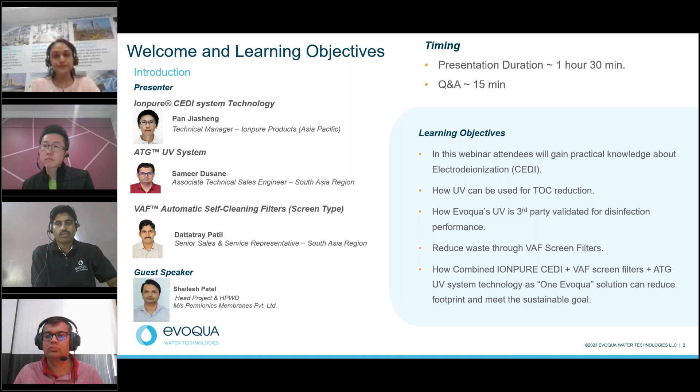Before I start with the product presentation, I will take you through a brief corporate overview. Evoqua Water Technologies is a leader in water and wastewater treatment solutions. We have close to 4,500 team members spread across the globe, with presence in 160 plus locations, and more than 38,000 customers worldwide with more than 200,000 installations. We have offices in 10 countries, and as of September 2022, our revenue has been $1.74 billion.

Moving on, this is big news in the water industry today. The two water leaders are one now. Evoqua has joined hands with Xylem, and as one water company, we want to solve the critical water challenges faced by our customers, communities, and planet.

This is the evolution of Evoqua and our product portfolio, starting from 1913. In 1913, our first chlorinator was installed, and by 1918, more than a thousand cities had our sodium hypochlorite. By 1963, the Aqualator surface aerator was introduced. In 1980, our first OSEC, that is on-site hypochlorite generator system, was introduced. In 1987, our first Ionpure product was commercialized as CEDI technology.

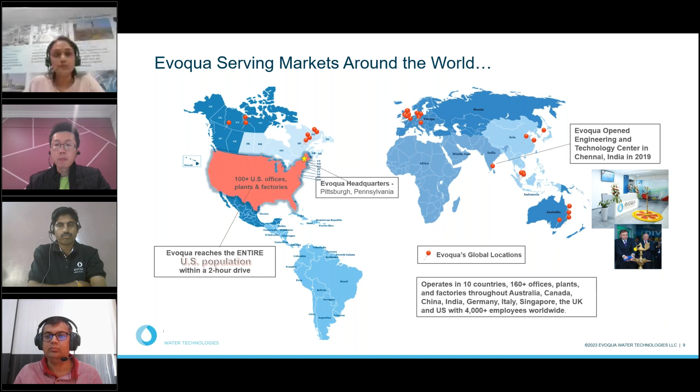We are serving most of the market around the world, with Evoqua headquartered in Pittsburgh, Pennsylvania. We have 100 plus offices in the US, which include plants and factories. We are operational in 10 countries, including Australia, Canada, China, India, Germany, Italy, Singapore, and the UK. We opened our India Engineering Technology Center in 2019. So this is how we are serving a large, growing, and fragmented market.

Starting with the Ionpure brand, which is a continuous electrodeionization product, we have supplied this to brands like Samsung, Toyota, and Toshiba. Our Chloropac, a sodium hypochlorite generating system, has been supplied to Tata, ONGC, and Shell.

Wallace & Tiernan is a gas-feed product and is the active and trusted chlorinator brand in India for over 25 years. Evoqua is an approved vendor for all the major end users, EPCs, and contractors.

ATG UV systems are supplied to most of the brands like Petronas, Cairn, Total, and Dong Energy. And Pacific Ozone is supplied to Coca-Cola, P&G, and Pepsi.

Our lab water products have 1,050 working stations in India, and we have 100% territory coverage with a reputed channel partner base. So with this, I'm ending the corporate overview.

I now request Mr. Pan Jiasheng to take us through the Ionpure brand presentation.

Thank you, I'm going to take over and cover the CEDI portion. I hope I have control over the screen. Suma, next slide please. All right, I don't seem to have control over my screen. Hold on, let me try. Yeah, the reaction is pretty slow, but it seems I have control already. Yes, all right, you have control.

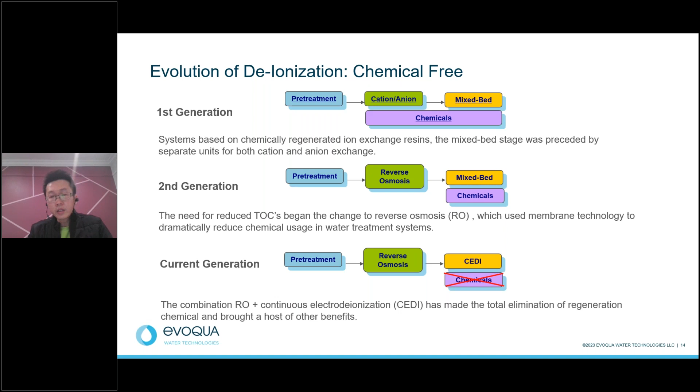In the 1990s, there was a driver for the need for reduced TOCs, so many switched to reverse osmosis. This membrane technology greatly reduced the amount of chemicals used. But after the RO systems, it still goes into a mixed bed, which also needs frequent regeneration. So in the 1990s, the amount of chemical consumption dropped probably by around 50%.

Since the early 2000s, there has been pre-treatment with UF, RO, and EDI. This has led to the complete elimination of regeneration chemicals, and it also brought a host of other benefits too.

Okay, all right, next slide, let's see.

So what is CEDI? CEDI stands for continuous electrodeionization, a water treatment technology that removes all of the ions in the water with an electrically active media, that is the resins itself, and makes use of an electrical potential to promote the ion transport into the reject stream.

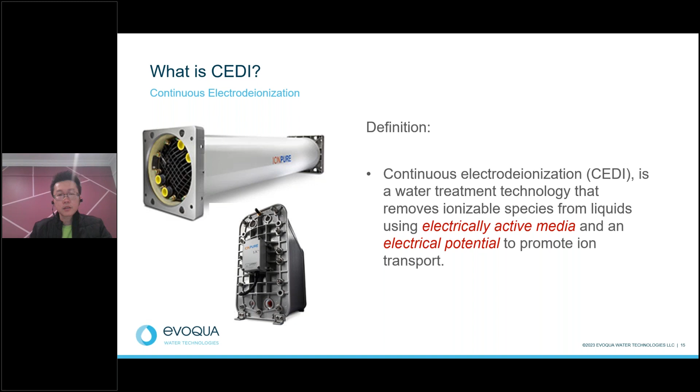For CEDI technology, it started off with the ED process. ED stands for electrodialysis. In the ED cell itself, there are alternating anion membranes and cation membranes. These are special membranes that only allow cations or anions to pass through, and all of these membranes are impermeable to water.

For ED membranes, only the ions pass through, and all of the water will not pass through. So all of the salts transfer out of the product stream and are trapped in the reject stream. So the ED process is not effective at producing high quality water. Its principal use is just for desalting brackish water, and also for seawater desalination.

Changing from the ED process into the CEDI process, all that we did is add resins into the module itself. So now there's a combination of the membranes and also the resins. These resins are very, very conductive, and they promote the transport of ions into the reject stream. It also requires a special cell to contain all of the resin.

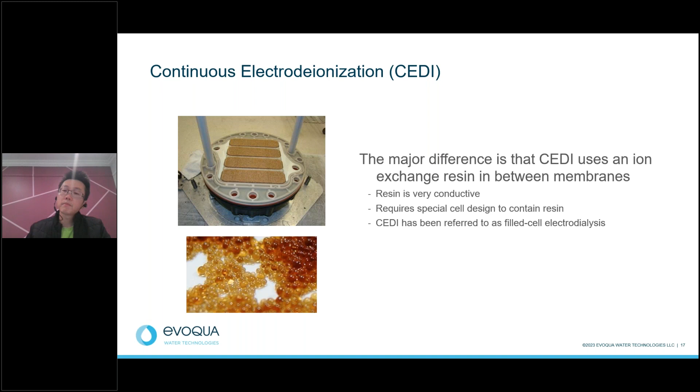Here is a moving diagram of how a CDI works. On the right-hand side, it's actually a 3-cell spacer where there is resin in all of the module. As water starts to flow through the module, all of the cations and anions get put into the reject stream, while in the middle stream there's the product water, which is the high purity water.

As the EDI cleans the water this way, all of the resins inside are going to be exhausting. But at the same time, in the module there is the water splitting process, the magic that's going on, where the water splits up into H+ and OH- ions, continuously regenerating all of the resins at the same time it's being used.

So instead of making use of real acid and caustic, what happens in the module is that the water splits up, and the H+ acts like the acid, and the OH- acts like the caustic. So the EDI process is a truly chemical-free continuous process.

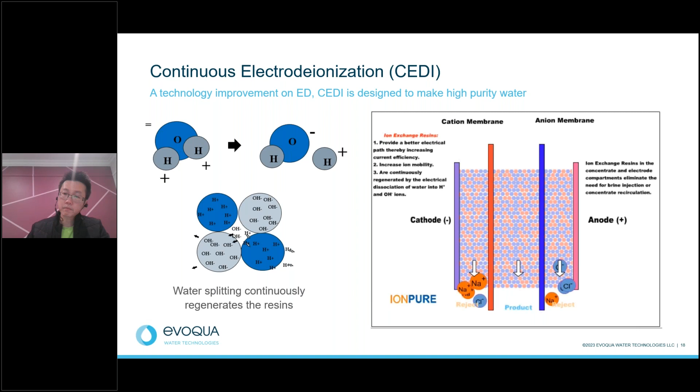With that continuous process and continuous regeneration, on the right-hand side diagram, EDI delivers consistent performance, consistent quality, consistent flow rate. If you were to make use of a conventional mixed bed system, as we know, it's a batch production, so there's a potential breakthrough.

At the point where it breaks through, the water quality on the product side is going to dip - there could be a breakthrough of silica, of sodium, or the resistivity could be too low. At that stage, the current mixed bed must be stopped, and the standby unit must kick in to continue water production.

So for CDI, it can actually exceed the quality of a mixed bed DI. That's because in a mixed bed DI, sometimes there could be poor regenerations, and there could be some losses of the high purity resin in the mixed bed, which results in a short vessel run.

CDI modules - in the Ionpure brand there's the normal grade of CDI modules and the high grade of CDI modules. The high grade makes use of special resins in the module that are able to achieve up to 99% or 99.8% of silica and boron removal. So in short, for CDI there are no spikes and no breakthrough in any way.

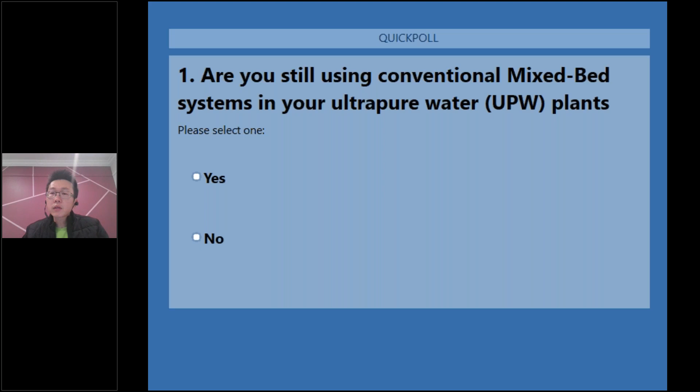All right. So I can see from the poll that 69% of the people are still making use of conventional mixed beds. And then 31% are making use of EDI, regardless of whichever brand is in the market. So for those people still making use of the mixed bed, please listen more. I'm going to talk more about the EDI systems. Okay, so next slide.

All right, so I'm going to come to the major cost components of the EDI. For the mixed bed, the major cost components are labor, resins, chemicals and wastewater. So a big bulk is going to be chemicals and wastewater. But for CDI, there's only labor, minimal labor, okay? And then there is module replacement once every 5 years. There is the consumption of DC power. And then there is also a requirement for some routine maintenance like CIP cleaning, which I would say, typically in microelectronics where the pre-treatment is much better, could be once in 2 years. So mixed bed DI is a batch process that requires constant labor and chemicals.

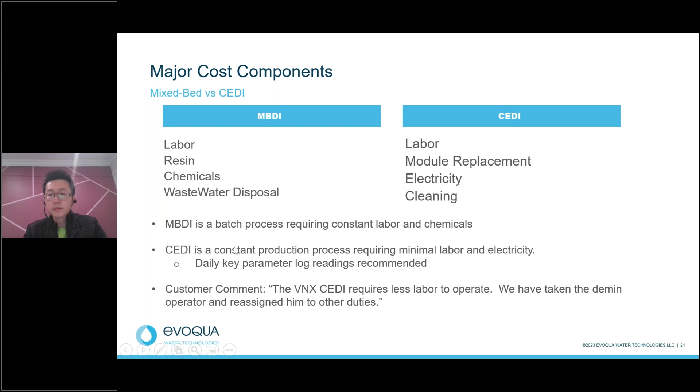All right, so in all, there is an OPEX cost saving of around 50%. So for the 31% of people who have made use of EDI, they would probably say that the purchase price is important, but it's not number one. Its operating cost is also extremely important, because that is a constant fee that's going to be paid on a yearly basis.

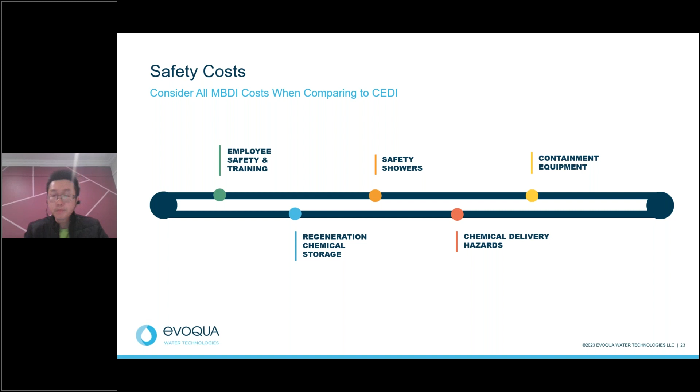Okay, so here is a quick summary of why the solar industry is going to choose CEDI over the mixed bed DI. Most importantly, there are no chemicals. There is very, very little downtime. It's a consistent performance. It's guaranteed leak-free up to 7 bar. There is superior safety. In terms of the footprint, it's very, very small.

In terms of its cost to operate, it's much less compared to the mixed bed DI. There is reduced labor, so the operators can do other things too. And for CEDI, it's a continuous process, it's not batch. And then there is a complete reduction of health and safety risk. All right. So my next slide.

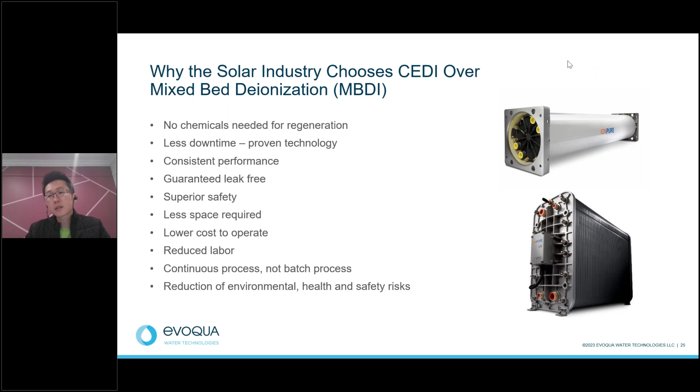All right, so here we are at poll number 2. I'm going to spend some time over here, just to ask what is the most concerning factor when it comes to equipment design in UPW plants. So please open up the poll. There are a few options, like safety. Is safety a concern for you? Is footprint a concern for you?

For plants that are currently making use of mixed bed, I guess the footprint is probably very concerning to you. Is low CAPEX cost or low OPEX cost important? And would you like your plant to be fully chemical free, or all of the above? Okay, I can see that still only 33% of people have voted. So let's wait a bit longer. All right, so we have 60% of people that have already voted.

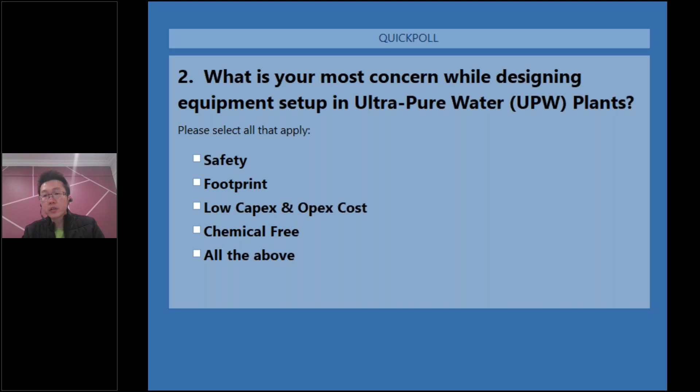All right, so I'm just going to share the results. There is 5% for safety, 11% on footprint concerns, and 37% on low CAPEX costs and operating costs. There's only 5% that want it chemical free, and then 63% are saying that all these things are very, very important to them. All right. So let's move on to the next slide.

All right. So here is a very typical setup for the microelectronics industry. It starts off with the pre-treatment.

And then it goes into a dechlorination system, where people use either the ACF or sodium bisulfite. After that, there is some anti-scalant, where it goes into a 2-pass RO. It feeds into an RO permeate tank. After that, it goes into a UV TOC and then into our EDI module.

So a lot of plants like solar plants make use of a UV TOC, and for our Xylem brand, we also have our own brand of UV, called the ATG brand. The presenter later is going to talk more on the ATG model.

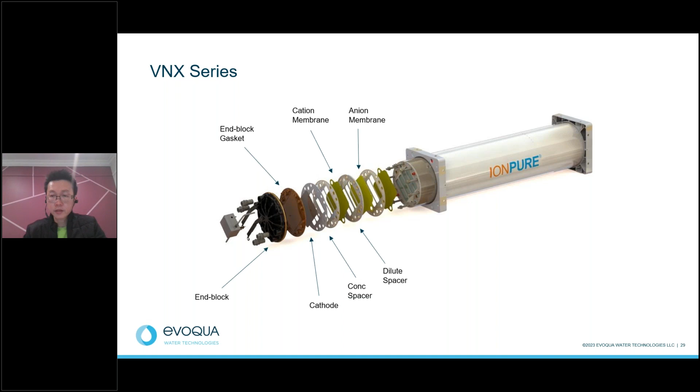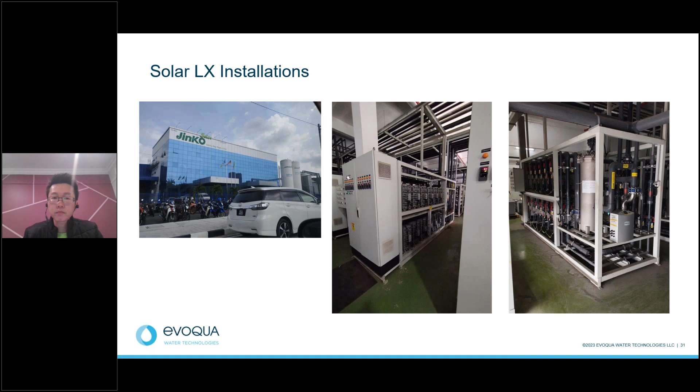Let me see if I can get back to the previous slide. It doesn't need any form of transformer. The DC3 controller takes in three-phase power from the factory source and dishes out a single-phase output straight into the module. Although the controller is quite big and bulky, there is no need for a transformer, so designing the control panel is very easy and sweet.

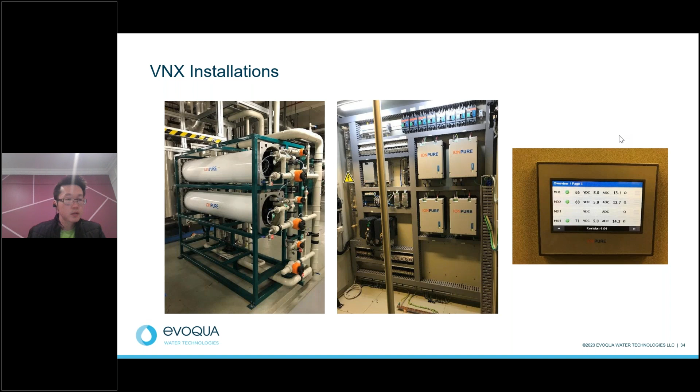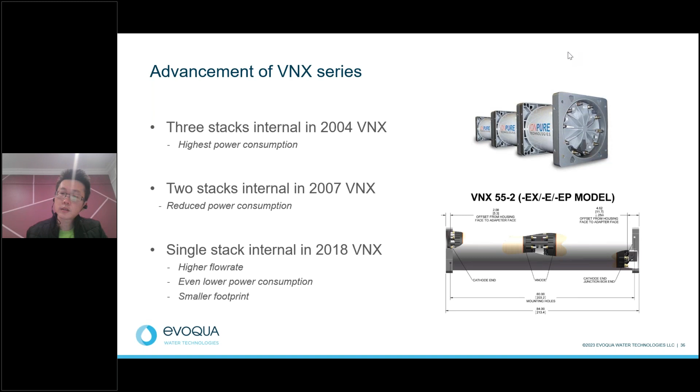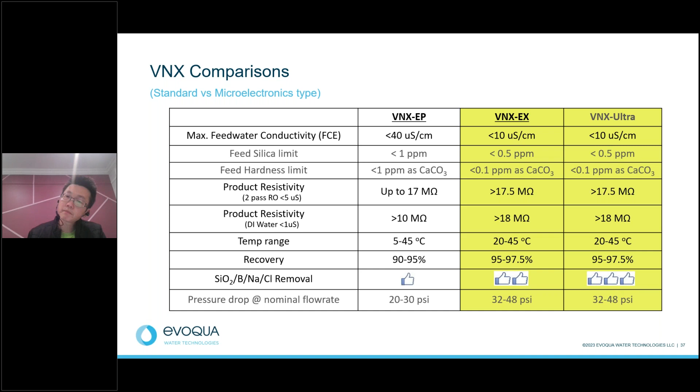All right, and then in terms of recovery, EX and Ultra is much higher, up to 97.5%, and more importantly the individual ionic removal is much better. Okay, and also just to let you know, the VNX Ultra is actually equivalent to a 2-pass EX module. The EX is up to 99% silica and boron removal, the Ultra up to 99.8%. Next slide.

Suma, can you help to move the slides?

Okay, and a lot of them want to increase their flow rates at the same footprint. So all they do is replace the VNX 55 with the VNX Max. It's exactly the same kind of module, the same resin configuration, the same performance, only the flow rate is much higher. So if you change one piece into the VNX Max, you get around an extra 10 GPM. So if you have a skid of 5 or 6, that is equivalent to getting an extra module in the whole skid itself.

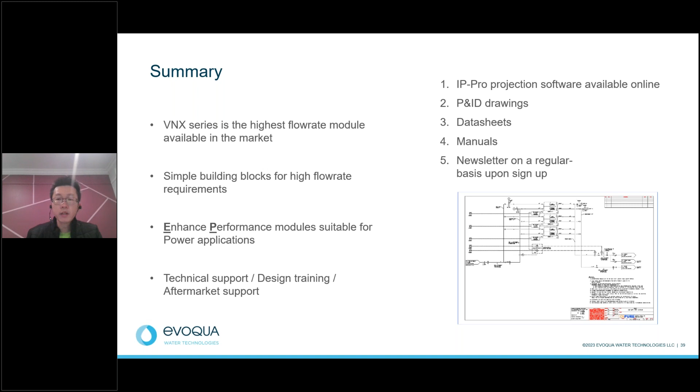All right, I think with that, that is the end of my presentation. If there's any questions, that's going to be at the end of the whole three presentations. All right, so I'm going to pass the baton back to Suma.

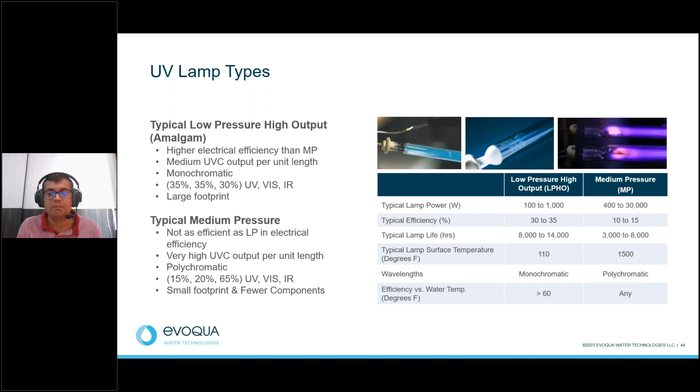This is the major difference in terms of safety and control systems - you don't need storage unless specific storage is required. The handling is very simple, you can transport it from anywhere, and no toxic or corrosive chemicals are required to operate this UV system. It's very easy to use, it's a retrofit design, easy to install, and you can change the lamp in one or two minutes. It's simple maintenance and reduces your OPEX costs also.

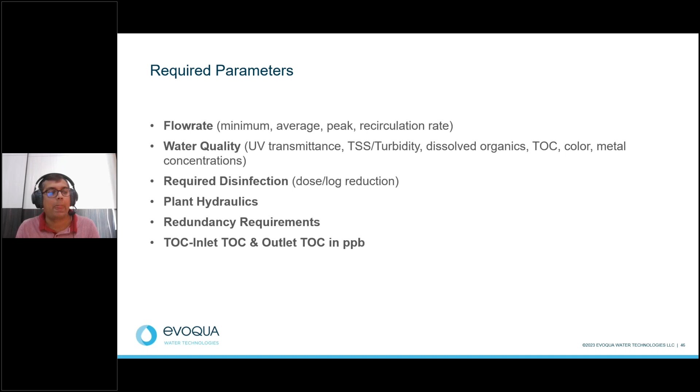Now, where can we use UV systems? You can use UV anywhere there's a process that's chemical intolerant, or where there's chlorine-resistant microorganisms. You can use this UV system across all industries - wastewater treatment and reuse, drinking water purposes, pools, water parks, irrigation, and most importantly electronics and pharmaceutical, automotive. Any industry can use this UV system.

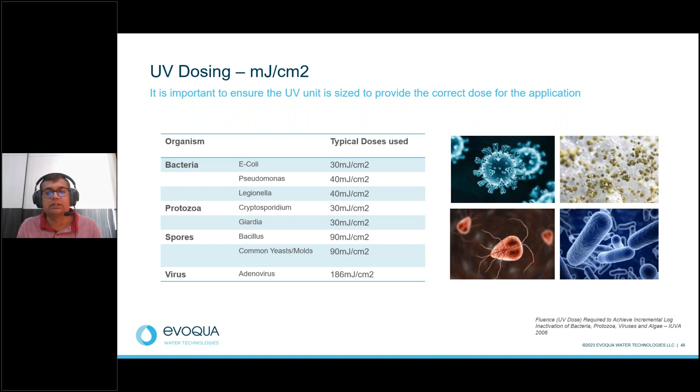Now your poll starts. 20% of people are saying 253.7, 33% are saying 185. 42% of people have voted, 48% checked within 5 to 10 seconds. Now 61% have voted.

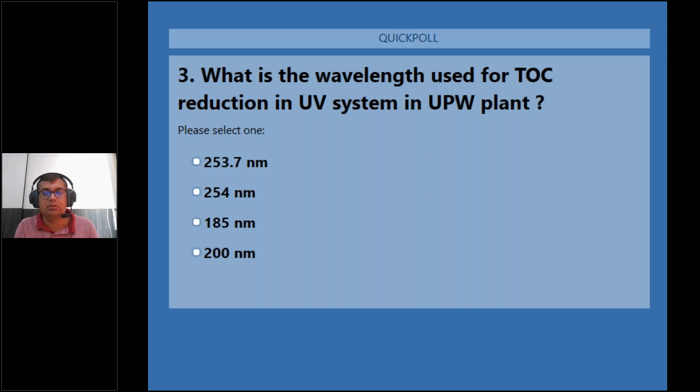Now we can see the poll results. 21% say 253.7, 32% say 254, and 32% say 185 nanometers. Actually, 185 nanometer is the correct answer. Theoretically, 185 nanometer is required to inactivate and reduce the TOC from ultra pure water. We'll discuss later in this presentation how the TOC reduction mechanism works.

We have an ATG UV system, and we have one model for TOC reduction, the VT series. ATG UV is around a 40-year-old UK-based company, with all manufacturing facilities in the UK. We have lots of installations globally over the last 40 years.

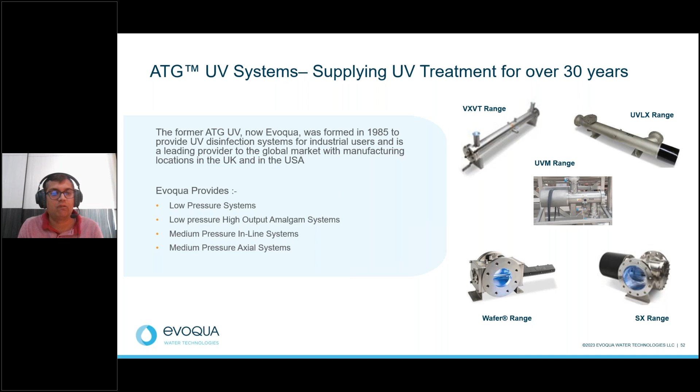Yeah, these are the product range we discussed earlier, low pressure to medium pressure. The brand name is called ATG in the APAC region and EMEA region, and for North America, the ATG UV system is called ETS as a brand name. Globally, we know them as ATG and ETS.

You can see here the low pressure system. Our range is available from 1 lamp up to 32 lamps. UVLX up to 45 lamps. Wafer series systems up to 12 lamps, and SX series 18 lamps, followed by UVM series for dechlorination and TOC purposes for 8 lamps. These are the variables, different types of lamps combined with the one UV system ranges available in our UV product portfolio. We can use any of these for different applications.

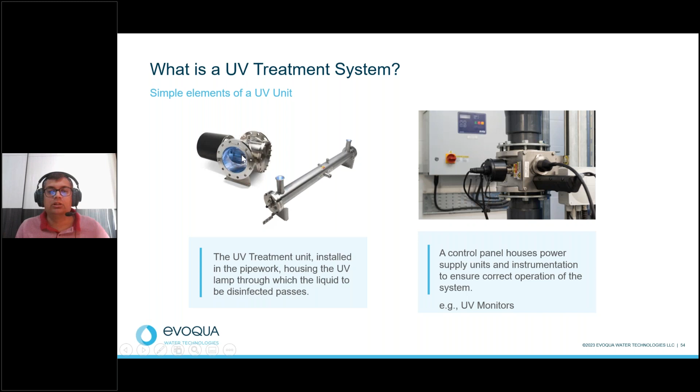It is particularly designed for the TOC reduction. This is what we discussed earlier.

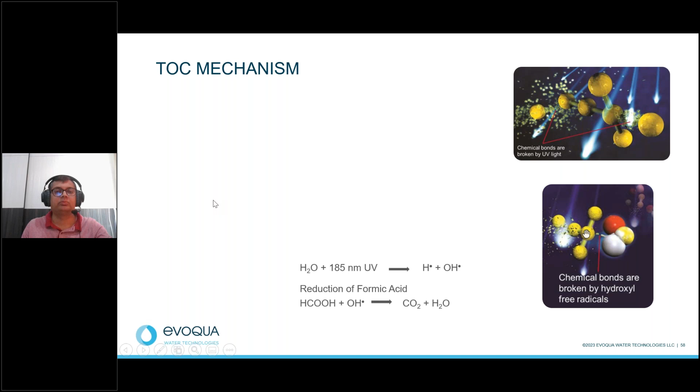This is the TOC mechanism. While most organic compounds are decomposed to CO2 and H2O, other more resistant molecules and weakly charged ions remain. This causes a resistivity drop, requiring removal by downstream DI and EDI systems. If you see here the diagram, TOC plus 185 nanometer breaks into H2O plus CO2, which gets released from the water.

This is the same mechanism we discussed. H2O plus 185 UV goes to H plus OH plus ions, and through reduction, formic acid HCOOH plus OH produces CO2 and H2O, which get released.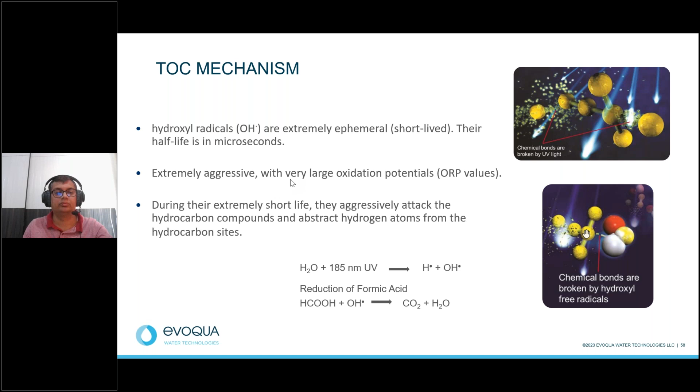This is our VT lamp - a key and efficient TOC reduction unit in ultra pure water applications, with maximum up to 25% 185 nanometer TOC output. The high levels of 185 nanometer spectrum require less power energy, but at 254 nanometer, higher power is required to operate TOC reduction UV systems - very high dosage and very high power is needed. This is the simple comparison we can discuss here.

Our VT lamp is made of the finest grade material, with a longer life up to 16,000 hours. It's available with 300 watts of UV lamp power, very high compared with others. Due to this high power, fewer lamps are required even for higher flow rates.

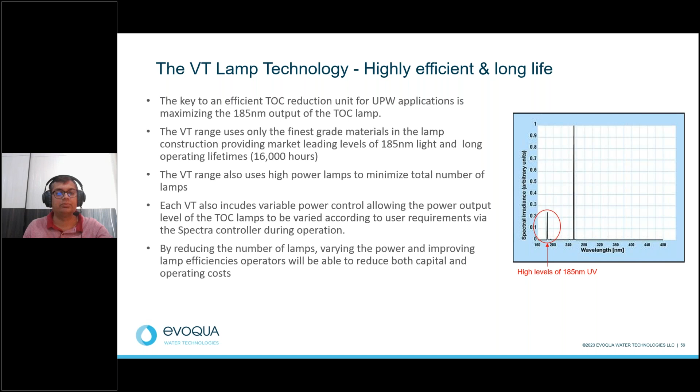Yeah, this is where we can discuss semiconductor, where the very high ultra pure water, type 1E water, is required, and for solar industries. So you can see here less than 1 ppb water is required to reach the wafer of the semiconductor device. This is the major advantage of the UV systems.

If you use this water, you get greater wafer yields and the switch to smaller chip geometry, such as 0.07 micron line width. It's a very high performance UV system we can offer you compared to the others.

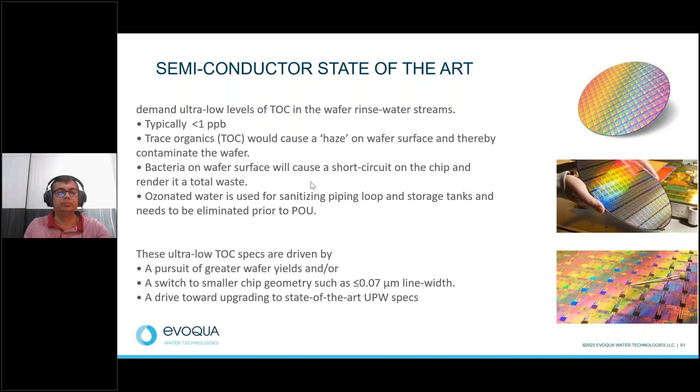Yeah, you can install the UV system vertically or horizontally. This is flexible installation, with a small footprint area required. This is an example of the VT24 model you can see here. Next slide, please.

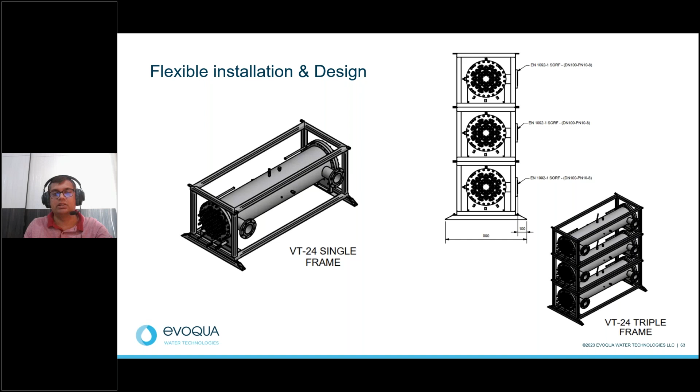Yeah, some reactor features we can offer you are a simple TwistLok design mechanism, and a V Clamp design for leak-proof design. You can change the lamp in the UV system in hardly 1 or 2 minutes, even in running condition. This is our patented technology we can offer you in the UV systems. Suma, next slide.

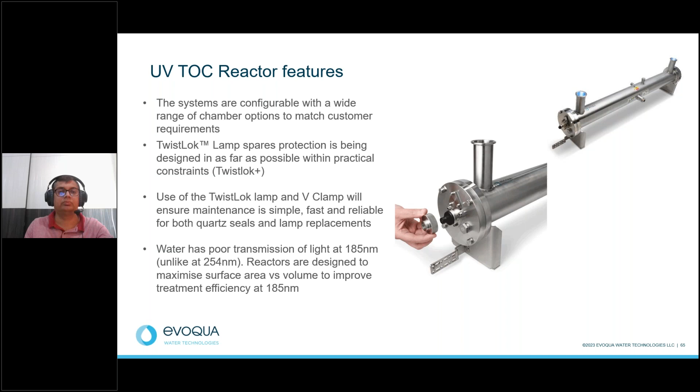Yeah, these are some reactor features, as per the ultra pure water requirement. We can see here the lamp life is 16,000 hours for the 300 watt UV lamp. It's a TwistLok design. The internal and outer surface finish is available at 0.4 or 0.8 RA. If you require electropolish or mechanical polish, machine polish is also available.

Most important, the UV system has a variable power controller. It operates depending on your flow rates or your UVT, from 60% to 100%. It's an automatic dose-based system. You can reduce the power of the UV system. Yeah, these are some features available in our UV systems.

And this is the controller, a microprocessor based controller. You can configure it with your Modbus and BMS systems, and you will get all this data from the microprocessor touch panel UV system from your remote location, and you can see what the parameters are

and the current, all these things you can check with your mobile and your tablet. The only thing is the equipment must be connected to the internet. This facility is also available in our Spectra UV control panel. Yeah. So my next slide, please.

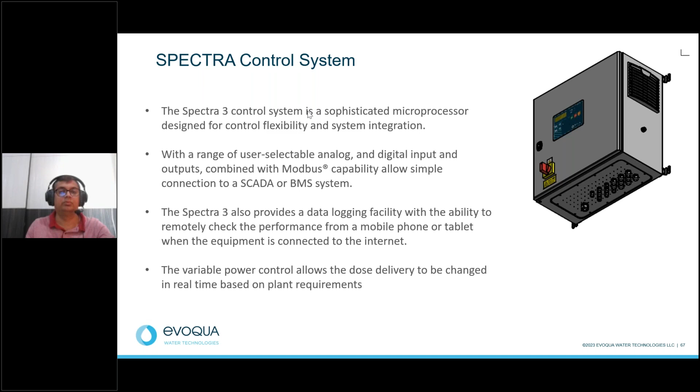Yeah, this is the Spectra controller range. Standard and options are available. In terms of material, the standard we offer is epoxy mild steel, 7035 color. Stainless steel SS304 option is also available. It is a microprocessor based control panel. For ingress protection, IP54 and IP56 are also available for outside application.

It's environmentally controlled; we can install a forced air cooling fan for ballast cooling for these UV systems. The communication ports available are RS422 and RS485. It has a door locked MCCB isolator and operating temperature up to 40 degrees centigrade. We can share our product catalog, or it's available on our website. Yeah, Suma, can you go to the next slide?

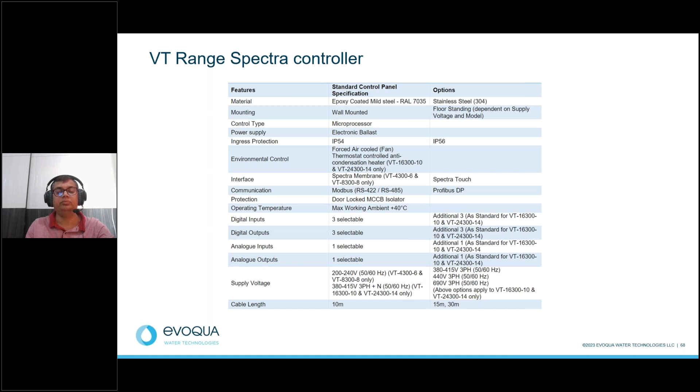Yeah, these are the control units available in our microprocessor-based control panel. You can display information: the lamp running condition and how many hours, the lamp current, how many strikes per day, the lamp fault information. If the lamp breaks or the quartz sleeves break, the information goes to the system and the system starts or stops in any fault condition.

For analog input, a UVT meter or flow meter can also be configured on our UV system. And as we discussed, both communication protocols are available, and Profibus DP is also available, but it is a non-standard panel. Optional, we can offer you. So next slide, please.

Yeah, these are the digital inputs and outputs. You can configure them as per your process requirements. With the three digital inputs you can remotely start, stop, power boost. You can connect the UV panel according to your water level tank. You can reset alarm, process interlock. Outputs are temperature alarm, remote control, dose healthy. If the dose is not healthy, then you will get details on your UV systems. All these digital outputs are available in our UV systems. Suma, next slide, please.

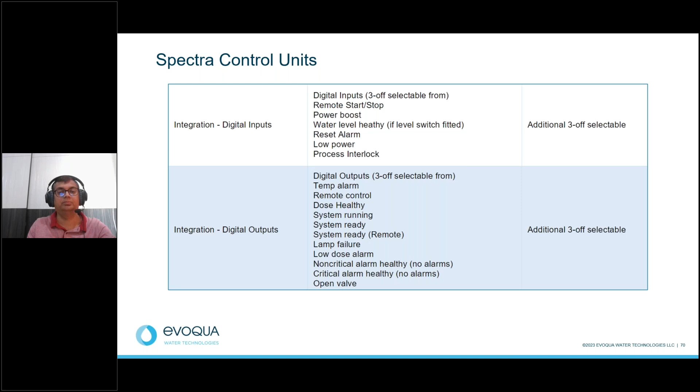Yeah, as we discussed earlier, the data log is available, and you can get all this data to your remote location by Profibus or Ethernet connectivity or any web access, like dosages, UVT, power, lamp hours, lamp current. All these data are stored in the microprocessor-based control panel, touch panel. You can access it anywhere. Yeah. So, next slide.

Yeah, this is the simple architecture for the microprocessor-based control panel. The membrane with OLED touch display panel, or a 7-inch touchscreen also available for higher models. All the data is stored on the SD card. You can remove the SD card and check the data. The SD card is connected with the motherboard and the touch display panel. And this is the electronic ballast, and the motherboard operates the electronic ballast of the variable power controller system. Suma, can you go to the next slide?

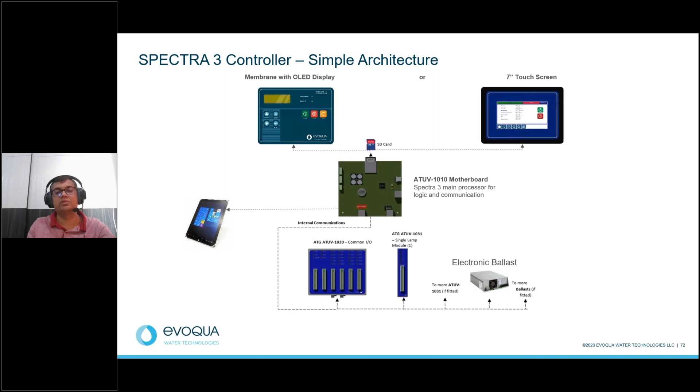Then there's some transition there. Hello. Yeah, just a second. Am I audible? Yeah, you are audible. Can you go to the next slide, please? I think, yeah, I've gone to the next slide. I think it's not visible at your end. It's not visible.

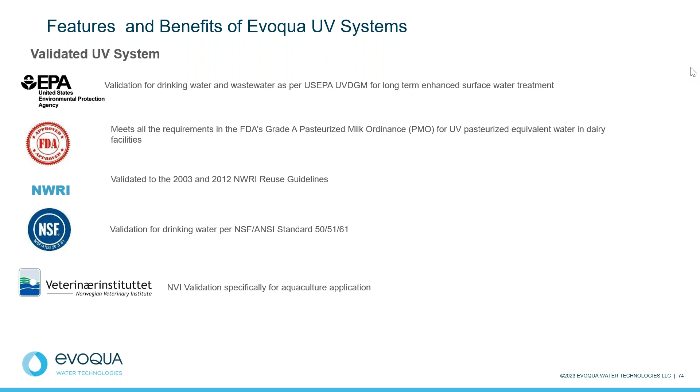Hello. Yeah, yeah. I've gone to the next slide. Yes. I think the last slide is some case studies and installation photographs. Can I switch off my camera? Then the transition will be faster. Can you change the slide? Yeah, I've changed the slide to the case study slide. It's waiting for the next screen. Connection, just a second. Weak connection.

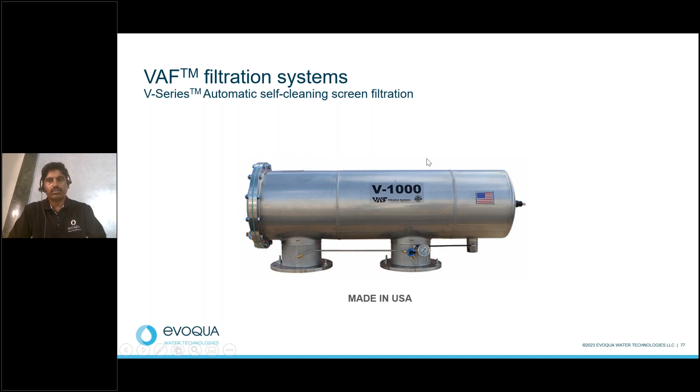Filtration technology landscape. Yeah, next slide. I've moved on to this next slide. Yeah.

So this is the filtration technology landscape. You can see what particulates are available in the water and what technologies are available in the market. From centrifugal separator to screen filtration, media filtration, bag filtration, cartridge filter, these are the technologies available. So according to the particle size, we will choose the filtration system.

These are the particulates available in the water, like human hair, plant hairs, beach sand, and so on. According to the type of particulate, we will design, consider, or propose the technology. Out of these, we will discuss screen filtration in detail, that is, automatic screen filtration.

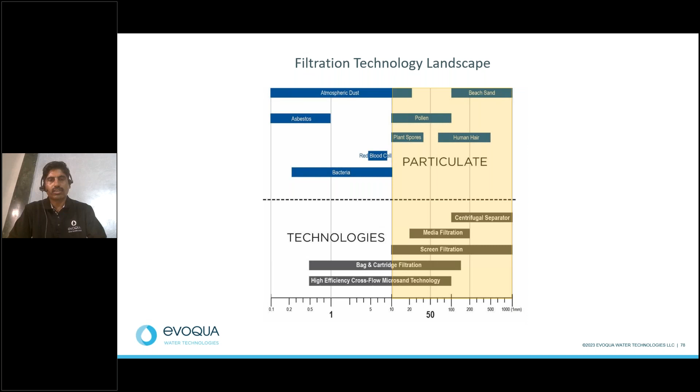Okay, next slide. Yeah, just waiting for the next slide.

The history of this product is that in 1985 the screen filter was introduced by one of our US distributors and named the automatic self-cleaning filter. In 1995 standard manufacturing started, piston type and electrical type, called the VAF-2000 series. Then in 2003 a new patented design was introduced, our V series automatic screen filter.

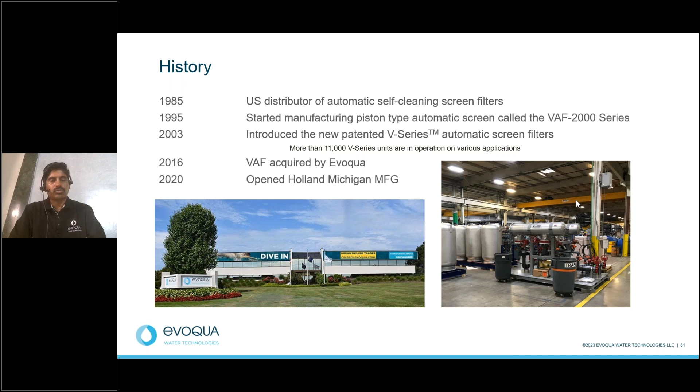By 2016, the automatic screen filter had more than 11,000 installations around the globe for various applications. In 2016, Evoqua acquired this VAF filter, and we opened a new facility in 2020.

Next slide, Suma. Yeah, I'm on the next slide. So as I told, we have 11,000 installations worldwide. This is a map where you can see the installations, and you can also get the details if you want. So next slide.

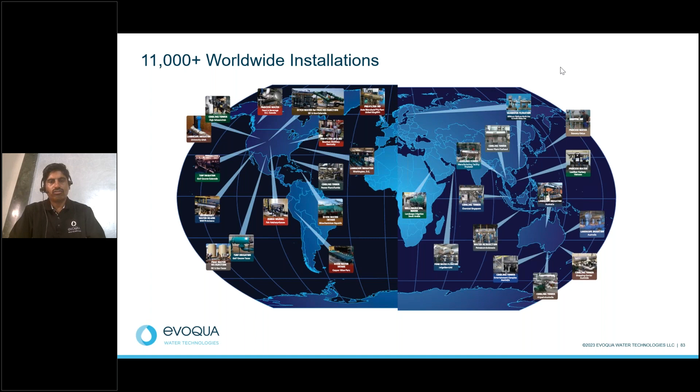Yeah, there is a poll question. Just a minute. The poll question is: what type of pre-treatment filtration system is currently used in your ultrapure water plant? Okay, your poll starts now. There are three options: conventional sand filter, any screen type filters, or others. Okay.

Yeah, close the poll questions. Yes, so, okay, next slide please.

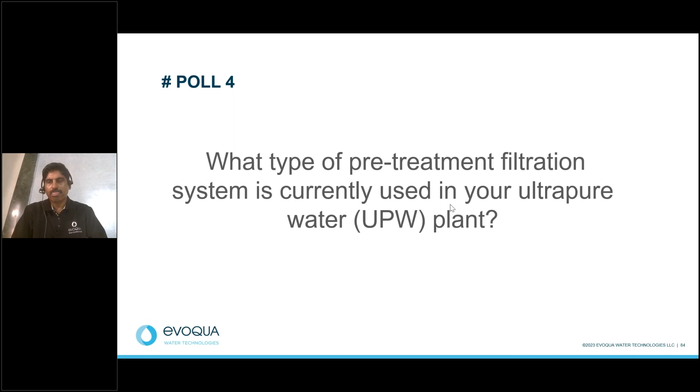So this is automatic screen technology, how it works. We are just explaining with this video. Please, next slide.

Next slide. Yeah, it is coming. It is processing. Patilji, can you please switch on your camera? Then the transition may be faster due to the low connectivity. Okay, no problem. Next slide. Yeah, just a second. It is waiting for the next screen.

Yeah, so this is a video where you can see the filtering mode, how it filters the water in normal mode. Please start the video.

Yeah, it is started. Not started. You click it here. Yeah, I've clicked it. Starting.

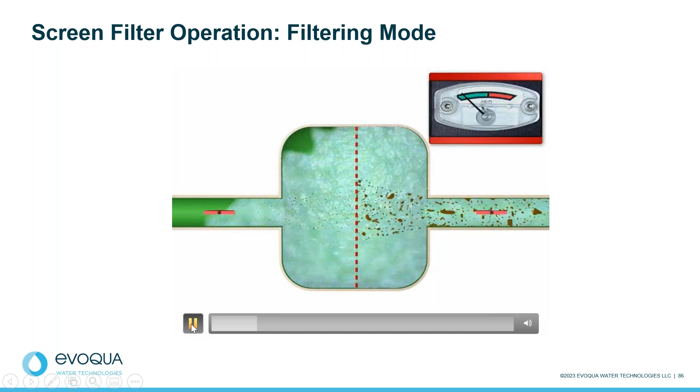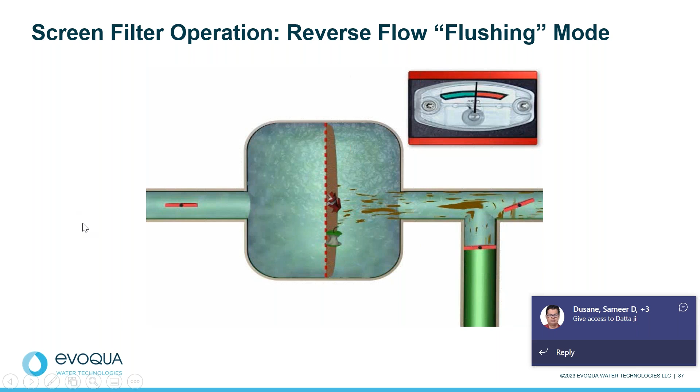Next screen. Screen filter. Reverse flow flushing, but it's not showing here. Still it is filtering mode. You can stop this video first, then go to another slide. It is showing it is still running this video. Just close or stop this video and go to the next. Otherwise, I will give you the access, keyboard and mouse control, so you can operate it from your end. My screen gets stuck with that video. Now you're on the 89th slide. Sorry, because of some technical issues, sorry for the disturbance.

This is the filter types, that is screen filter types. One is the piston scanner, single pass technology; electrical drive, which is also single pass technology; and the third one is the V series system, patented bidirectional cleaning multipass. So these are the three technologies available for cleaning these pre-filtration systems.

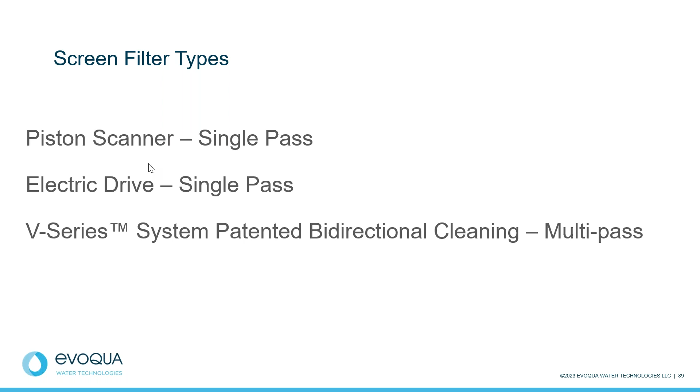So first one is the piston scanner filter. This is the assembly. This is simple, single pass technology, operated using a piston on-off. Piston scanner filters have some benefits: lower cost, simple controls. It is useful for agricultural drip irrigation.

And it has some disadvantages: no control of suction nozzle movement, higher flush flow rate. They take higher flow for flushing. Doesn't work well at pressures above 5 to 6 bar. And we found some shaft seal leaks also. These are the disadvantages of the piston scanner filter. Next slide.

So this is the second one, the electrical drive filter, which is operated by electrical drive technology, and which is again a single pass filter. Next slide. They have some advantages: controlled suction nozzle movement, meaning the nozzle is controlled electrically, and it works well up to 10 bar.

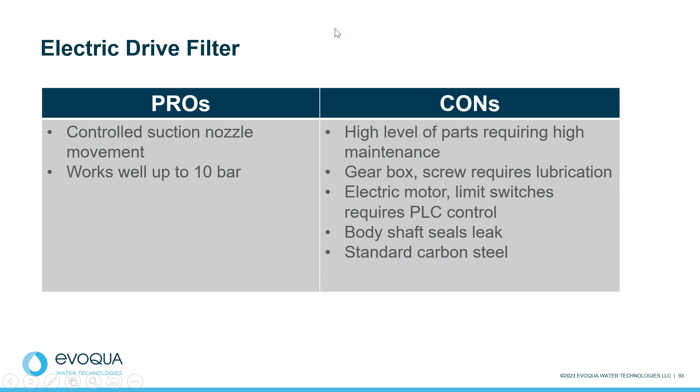So the third one is the V series automatic screen filter. This has 60 parts. Next slide please. So this is the main part: this is your inlet, this is the outlet. It has the main coarse screen, which traps all coarse particles, then water passes through the fine screen. The fine screen takes care of the other fine particulates and goes to your outlet. Inbuilt is the suction nozzle, and a water motor inside for movement of the shaft.

During operation, after delta P builds up, the filter automatically goes to flush mode. Next slide. So how it works inside, this is a video, please start the video. This is the filtration mode. Water comes from the inlet, goes to the first coarse screen, in to out. Then, using the shaft movement, it goes to the next screen, that is the fine screen.

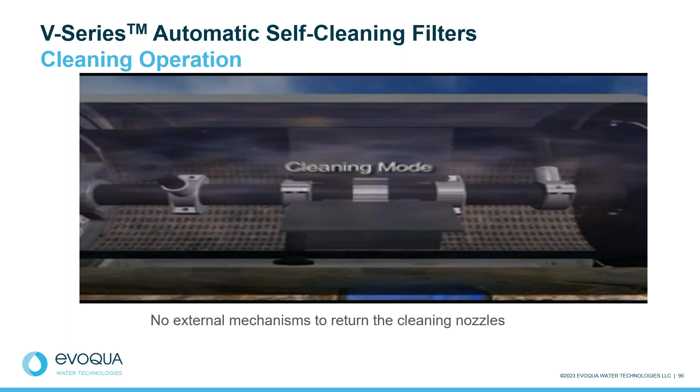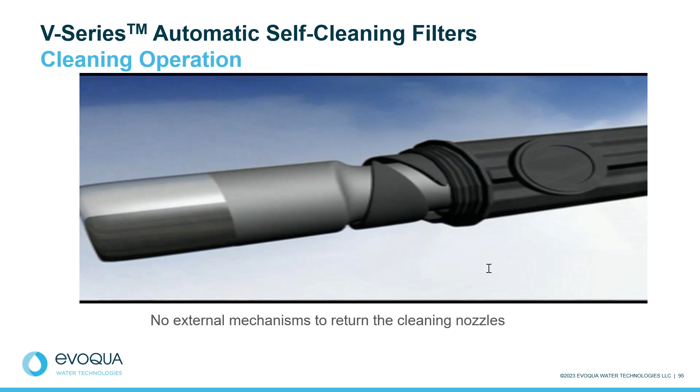And when delta P gets above 5 psi, the flush valve opens automatically. By using this vacuum, the shaft rotates and does the cleaning inside the screen using reverse flow, reverse acting. All media, all screens get filtered by this flapper. 10 to 15 seconds are required for one pass, and this is the indication that cleaning mode is going on.

This whole process, from filtration to cleaning, is automatic. No external mechanism is required for these cleaning nozzles. So you are continuously getting outlet water during flushing mode also. This is one of the advantages, and the flush discharge is only 1% of your feed water. So a very small amount of wastewater goes out during flushing mode.

Next slide. Next slide, Suma.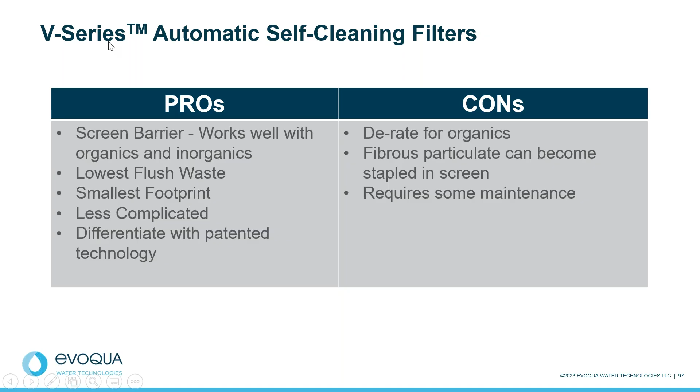This is the technology differential feature, that is the patented cleaning mechanism. Simplicity, minimal parts, no external shaft or seals required, no pistons or electrical motor required for moving these shafts, and minimal maintenance. Next.

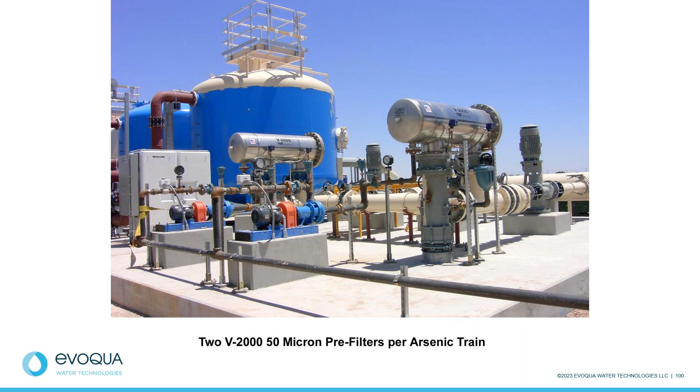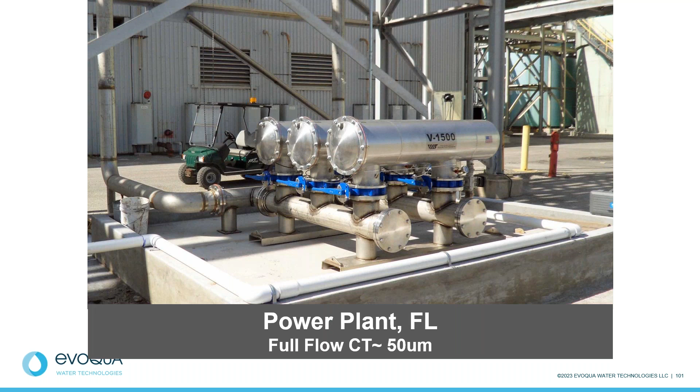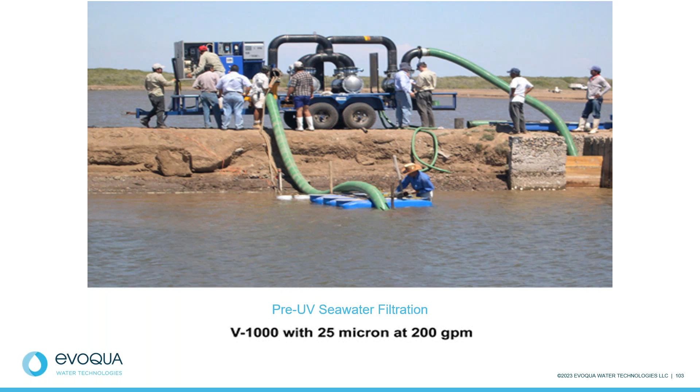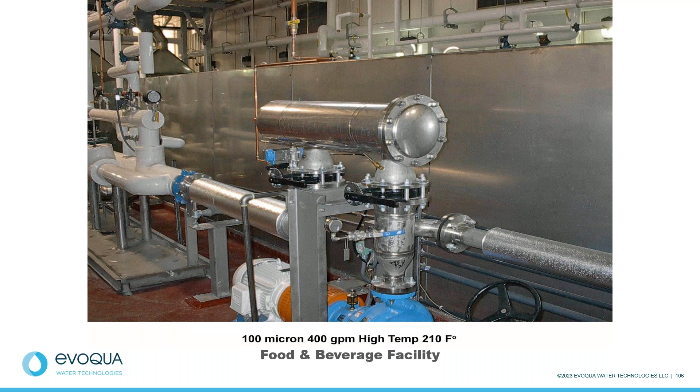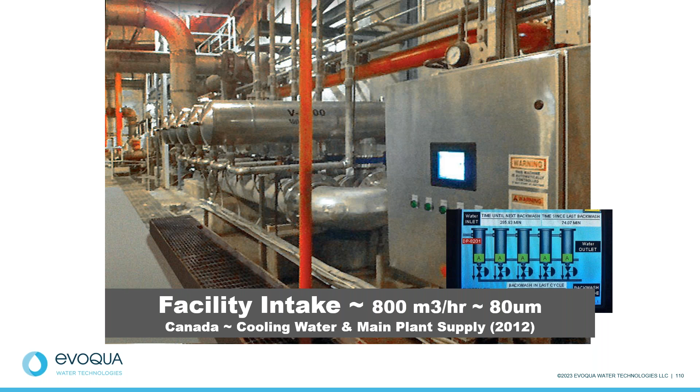So this is surface and depth filtration, that is inlet to outlet, top to bottom, and backwash from bottom to top, reverse flow. And it has some media inside: coarse, fines, pebbles. Next slide.

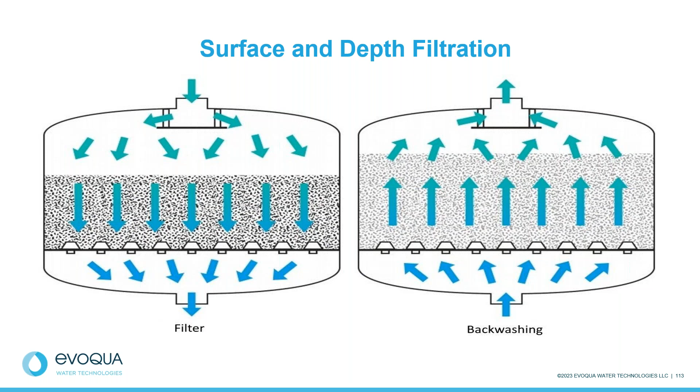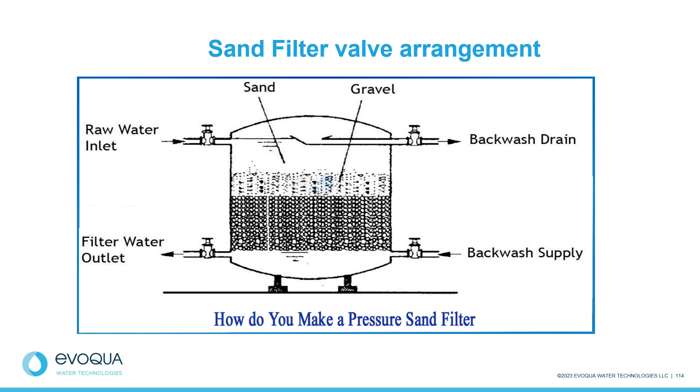So this is the filtration arrangement: raw water inlet from the top, and you get outlet filtrate water at the bottom, and through the same valve you can give backwash from the bottom, and the backwash goes out from the top. So it is basically top to bottom or bottom to top.

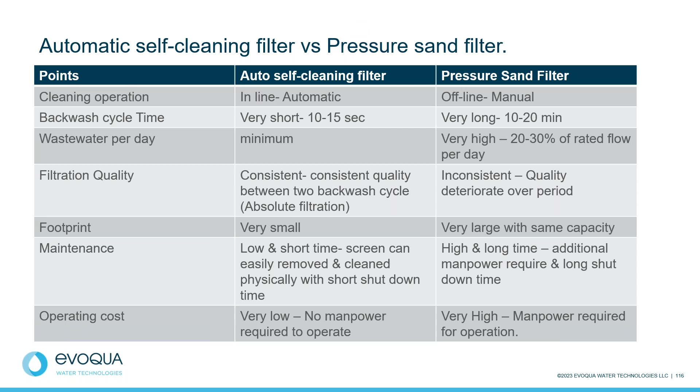Next slide. I think the slides end here from my side. So if you have any questions, you can ask during the last session, or you can send me the mail.

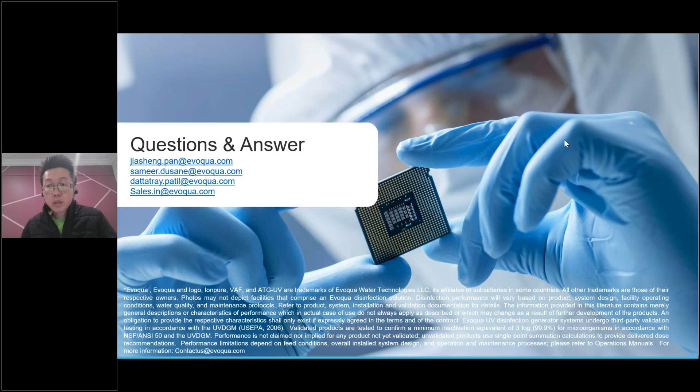Hey, is it possible to share my screen? Yes, you can share your screen. Just a second, all right.

So what I've done is a Microsoft Excel sheet on the parameters. That's based on an FCE of around 12 microsiemens, consisting of 5 microsiemens from the 2-pass RO, about 2.5 ppm CO2, and quite negligible silica, based on the quantity of the modules.

It's also based on the flow rate, so it gives an estimate of the power consumption in kilowatts per day, assuming you're running on a 24-hour, 7-day basis.

All these numbers I tried to derive from the IP Pro software. If you have your feed water parameters and flow rate, it can actually tell you better in the software. But here is a slide of what I have: if you have around 6 modules of VNX Max, it's close to around 200 kilowatts per day.

If you compare that to the conventional mixed bed system, conventional mixed bed doesn't need any electricity, but it's more about the chemical consumption, the daily purchasing, and wastewater disposal, which I showed in my slides. I think they cost a lot more in terms of OPEX compared to the CEDI.

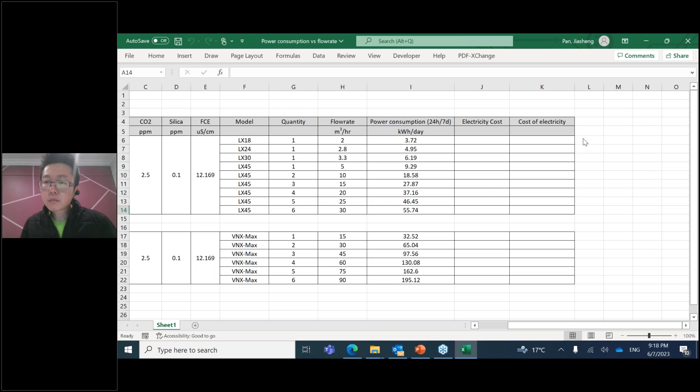Next question: what is the difference between the conventional filtration technology and the current technology you are talking about? This question is for the VAF, directed to Dattatray Patil. Can you please answer this question?

The answer is that conventional technology requires filter media, which is fine, coarse, pebbles, and the system has an inlet and outlet with backwashing, and the filtration mode is also manual. So it takes a long time, and after some time of operation the quality becomes inconsistent. It also uses filtered water for backwashing.

If you compare this with our automatic screen filter, it's a fully automatic system. It doesn't have any filter media inside, only a screen that works to accumulate and remove all particles. The same water can be used for flushing or cleaning the screen, and the flush flow rate is very low, about 1% of your total feed flow.

Conventional mixed media filters have been used for a long time, but they are corrosive. Our automatic screen filter uses SS316 material, so the corrosion aspect is very negligible. That's the difference, and also our VAF filter has a lower footprint, while conventional filters require a higher footprint. I hope I've given the answer.